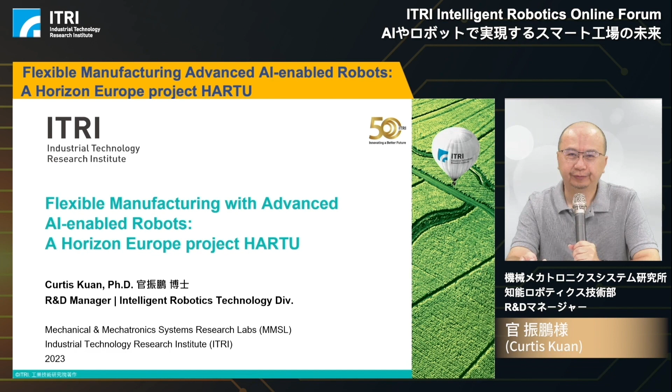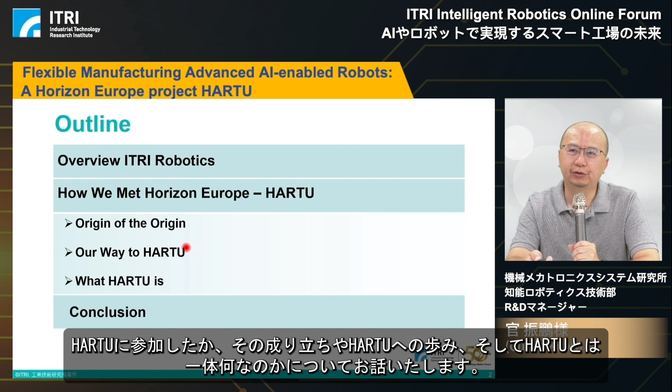First, here is the outline of today's presentation. First, a brief overview of ITRI Robotics is introduced. Then, how we joined the HARTU project, including the origin, the progress to HARTU, and what exactly HARTU is. Finally, a conclusion is provided.

As we know, ITRI was founded in 1973. It's an independent nonprofit innovation institution in Taiwan. Our scope is developing technology for commercializations and nurturing open innovation with academia, industry, and global partners. That is why I am here to introduce our global collaborations, especially with the European partners. The other scope is incubating and spawning startups for emerging industries. The most famous spin-off companies are TSMC and UMC in semiconductor areas.

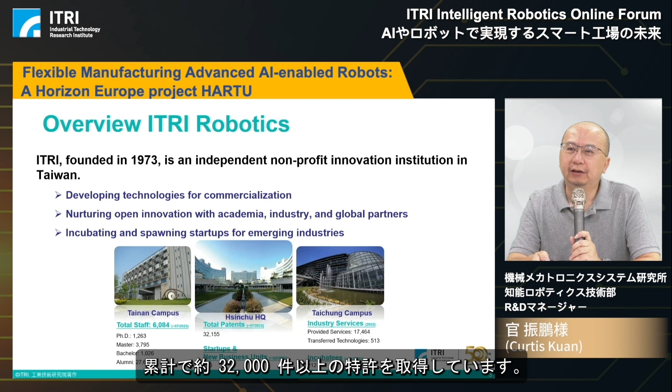ITRI has several offices around Taiwan and global branches in Tokyo, Japan, San Jose, Silicon Valley in the United States, and Berlin for the European business. Here is our basic information about ITRI. We have Tainan campus and the headquarters in Hsinchu and the Taichung campus. We got many staff with PhD degrees, master degrees, and we have total patents around 32,000 and more.

This slide will introduce our robotics achievement in the past years. For the future, we have robotic development in ITRI. We have core technology related to controllers that we call I Can Think, the vision system for robotic system that we call I Can See, and several applications, use cases in the practical industrial area. We call it I Can Work, and the mobility, I Can Move.

For the I Can Think, we especially developed the robotic controller and the navigation algorithm and the simulators with EZSIM and ASimo. The vision system is for the robotic system, we call it FOVision, especially for object recognition and navigation. For I Can Work, we have implemented several industrial applications, such as in aerospace manufacturing, drilling, or painting for the high-speed railway, and the grinding and polish application for the semiconductor instrument, and the robotic weaving system for the composite material handling.

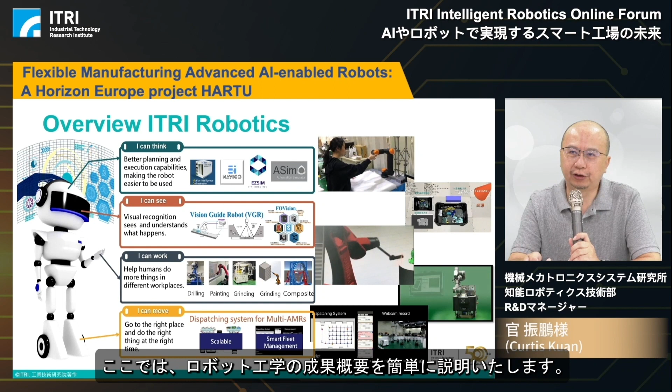Here, the next page, we want to say how we met Horizon Europe, HARTU.

I want to introduce the origin of the origin. From 2002 and 2003, we joined the European project called Muffins. This project is related to multimedia processing in the MPEG-21 environment. ITRI is one of the partners, and the other partners are Imperial College in the United Kingdom and IMEC for Belgium, plus other partners from European countries.

And the other project, from 2003 to 2005, we got another partner from Switzerland. Based on our research capability in the past, almost 20 years ago, we joined these two projects.

From these experiences with European partners such as Fraunhofer, Imperial College, IMEC, and Vodafone, we learned several lessons. The first is that the basic core concept idea is very critical. Use cases and user scenarios come first, then based on this scenario and requirement, we implement the technology development.

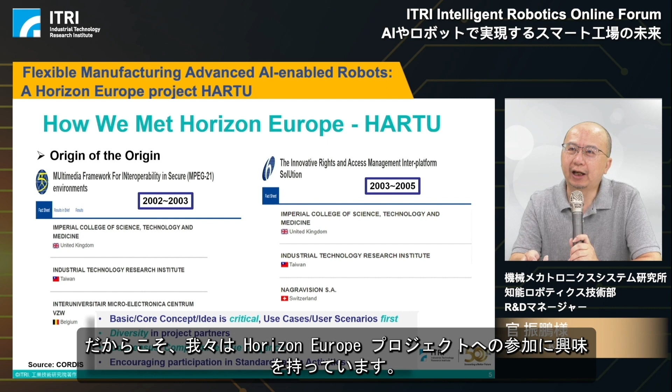In these projects, they encourage participation in standardization activities and promote the achievement from the project to standardization organizations. So from these experiences, project achievement will be more applicable to real and practical use cases in industrial applications. That's why we have interest in joining the Horizon Europe project.

So here is the slide showing our way to HARTU. In 2017, from the EU-Taiwan Industrial Policy Dialogue, we decided we needed to discuss AI robotics. EU and Taiwan agreed to focus on the development of AI plus robotics and start preparation of a robotics working group. In 2019, we established the EU-Taiwan Robotics Working Group.

In this working group, we discuss regulations, policies, and joint research topics, especially on AI, data, and robotics. This group was established based on the consensus of European Commission Director Generals, for example DG Grow, DG RTD, and DG Connect, especially for ICT technologies.

Through 2020 to 2022, both sides of EU and Taiwan discussed joint research topics, including digital twin, human-robot collaborations, and AI robotics. Based on our consensus from both sides, in 2022 ITRI cooperated with the German AI Research Center DFKI, the Spain Research Institute Tekniker, Philips Consumer Electronics, and the Turkey Automobile Company, forming a research consortium. We call it HARTU.

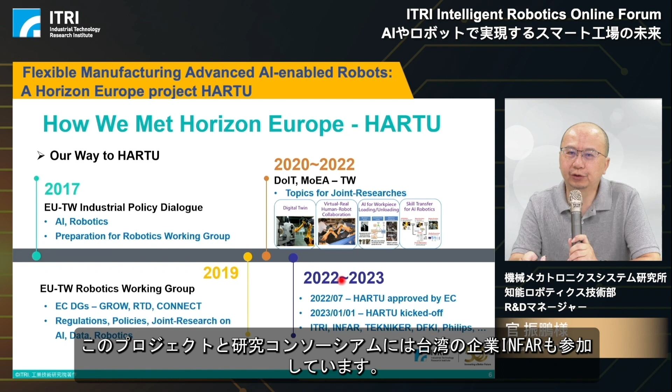This project got approval by the European Commission, and the project kicked off in January this year. A company from Taiwan, Infra, also joined this research consortium. So what exactly is HARTU?

HARTU is the abbreviation for Handling with AI-enhanced Robotic Technologies for Flexible Manufacturing. As described in the previous slide, there are several partners from all over Europe, plus two partners - ITRI and INFAR - from Taiwan. All partners are listed as this figure shows.

What HARTU focuses on are five use cases. The first is fixtureless assembly, especially for hand tool manufacturing, which will be implemented by ITRI and INFAR, the Taiwan partners. The second use case is assembly for consumer electronics, implemented by Philips and FMI, from the Netherlands.

The logistics use case and car assembly transport is implemented by Tekniker and TOFAS, the Turkey automobile manufacturer. And especially for the packaging use case, about food handling, it's implemented by the Italian partner POLIBA.

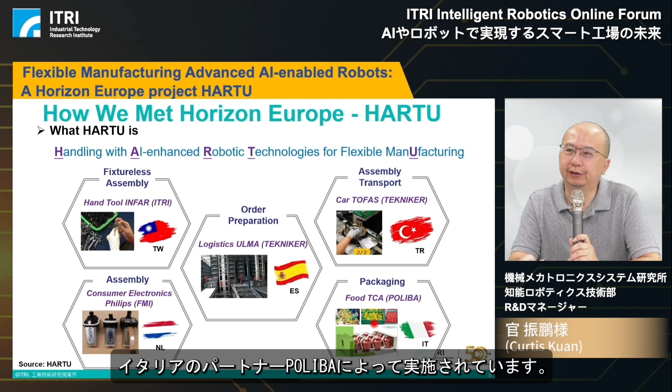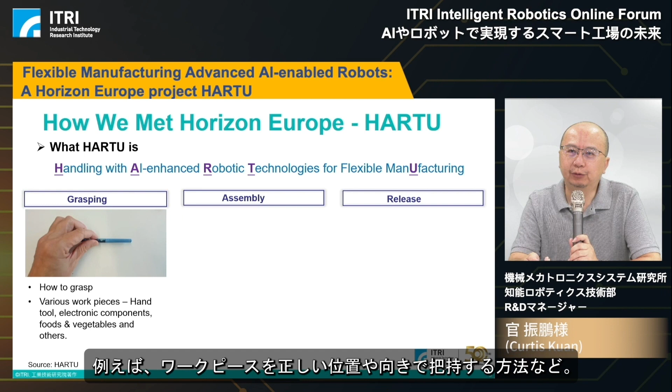In this use case, we want to focus on how to grasp a workpiece, such as how to grasp it in the right position and right orientation. We will handle various workpieces such as hand tools, electronic components, foods and vegetables, and others. From grasping, we need to assemble all the components into one product, so we need to handle the contact force, assembly procedure, accuracy, and compliance between the workpiece and the adaptation to various workpieces with different size and weight.

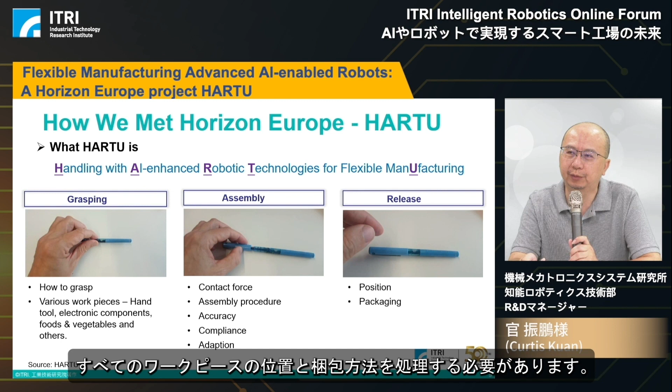And finally, we have to place the assembled product into the right place. We need to handle the positioning and how to package all the workpieces. So here is our scope for the HARTU project.

Finally, here is a brief conclusion. HARTU is a real international research project with 6 countries without mother tongue as English. By participating in this project, we will learn how to cooperate with various countries from Germany, Spain, Italy, Netherlands, Turkey, and Taiwan. We have to achieve consensus and compromise with each other, and do the assignment work with due diligence.

Here is the reference for the Horizon Europe Cooperation Framework. The European Commission has assigned a 95.5 billion budget for research and innovation activities.

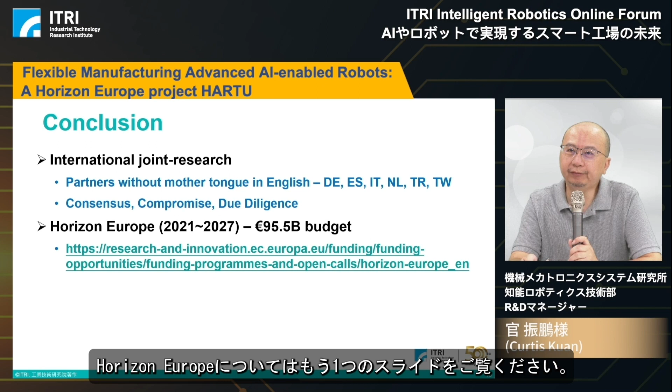Hi everyone, I'm Sergio. I am an engineer from the Robot Manufacturing Unit Department at ITRI. Today I will talk about our intelligent robot vision systems and meta factory developments. I'm going to introduce two key products developed by our department, RoboTwin and FOVision.

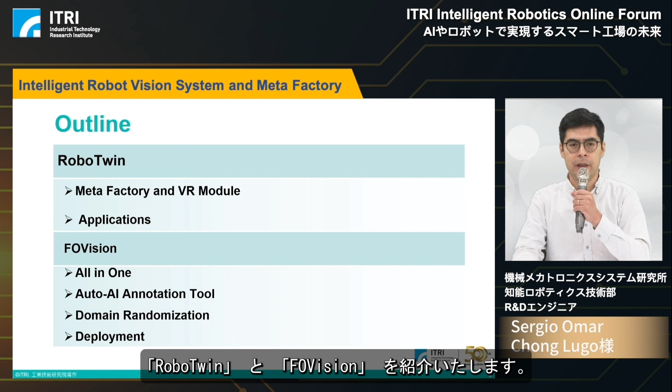Nowadays, in the context of global connectivity and increased demand for efficiency and an accelerated production pipeline, businesses are making their physical factories entirely describable in terms of software. No matter where users are located around the world, with the aid of 3D digital environments, virtual reality deployment, and a communication scheme between digital and real assets, users can perform sensitive operations in the digital world and bring optimizations to the real world. This is the idea for MetaFactory, which serves as a realistic virtual environment replicating actual factory layouts, robotic cells, and workpieces.

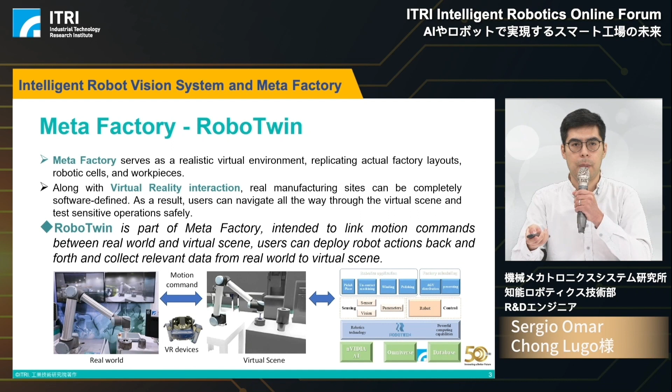Along with virtual reality interaction, real manufacturing sites can be completely software-defined. As a result, users can navigate all the way through the virtual scene and test sensitive operations safely. More specifically, RoboTwin, as part of MetaFactory, intends to link motion commands between the real world and the virtual scene. Users can deploy robot actions back and forth and collect relevant data from the real world to the virtual scene. The purpose of RoboTwin is to achieve capable human-machine cooperation by connecting VR equipment combined with a high-fidelity physical engine from NVIDIA Omniverse, resulting in a human-machine mixed-line interactive simulation technology.

Here we have one video. For instance, the user is wearing a VR headset and also grabbing a virtual stick. Using one of the VR controllers, making the virtual robot follow the stick. This action is related to robot teaching.

In another case, we have a user wearing a VR headset. Meanwhile, the virtual robot is performing defined motion commands, and compounds of data coming from the real world in the form of images and other graphics are projected into the virtual environment for the user's interest.

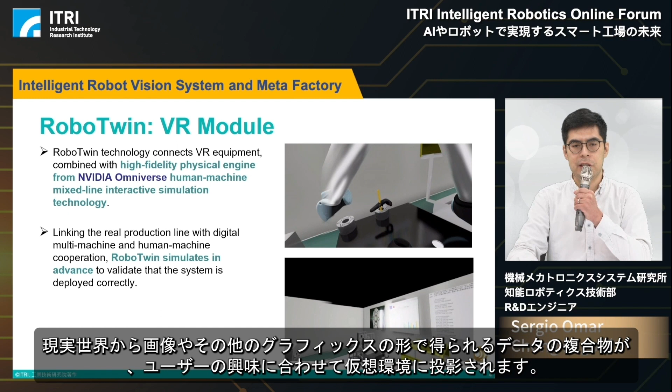RoboTwin comes with two operation modes. The first one is known as follow target mode. In this mode, the user grabs the virtual stick and the virtual robot will follow this tool in real time. Therefore, joint states will be shared to the real robot, resulting in real-time synchronization.

Robot safety is also considered, along with a virtual reset option to prevent both robots from any undesired displacement. One more feature is that 3D animations of the workers are included in the virtual scene to make the virtual reality experience more realistic.

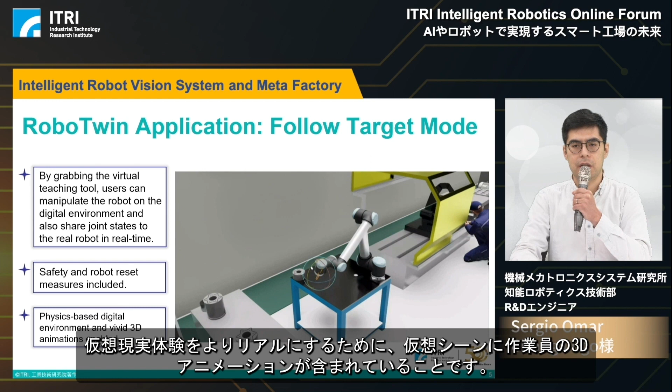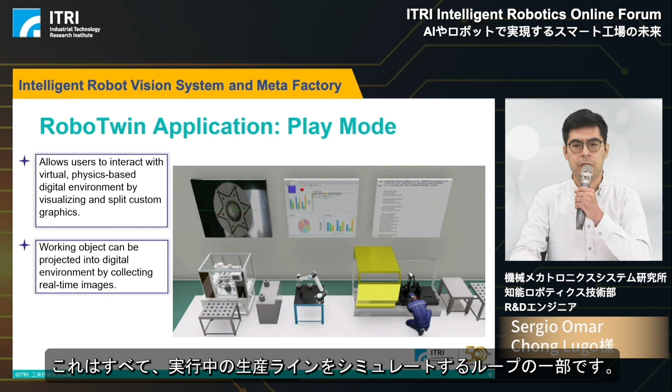Let us now refer to RoboTwin's second mode, known as Play Mode. In this mode, the virtual robot is given defined motion commands. Those are shared to the real robot to achieve real-time synchronization. At some point, data from the real robot is collected and projected into the virtual environment. This is all part of a loop to simulate a running production line.

So now, let us proceed with our second product known as FOVision. FOVision mainly consists of three pieces of hardware: a 3D camera, a particular lighting source, and an edge computing device. The system will collect light-controlled 2D images along with 3D point cloud data to be processed by an embedded AI object recognition model.

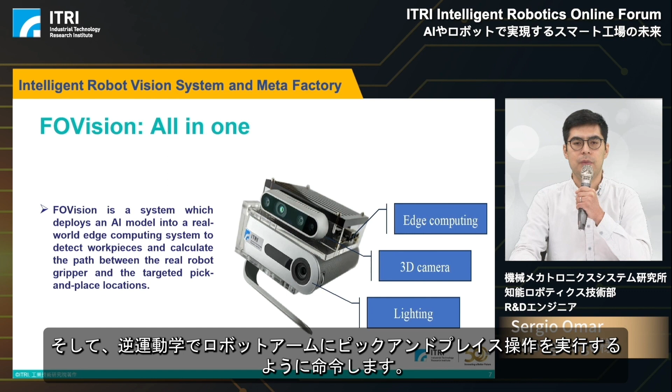At the same time, the system will compute pickable points over the work pieces, and it will command the robot arm with inverse kinematics to perform pick and place operations.

As a matter of fact, AI training for object recognition demands reasonable training datasets. Therefore, manual labeling can be tedious and time-consuming. In contrast, FOVision offers a modeling and automated AI tool capable of mapping real-world 2D images into each workpiece 3D CAD model representation. This tool not only enhances the realism of the virtual environment, but also automates the generation of annotated datasets, capturing pickable and unpickable points for each workpiece.

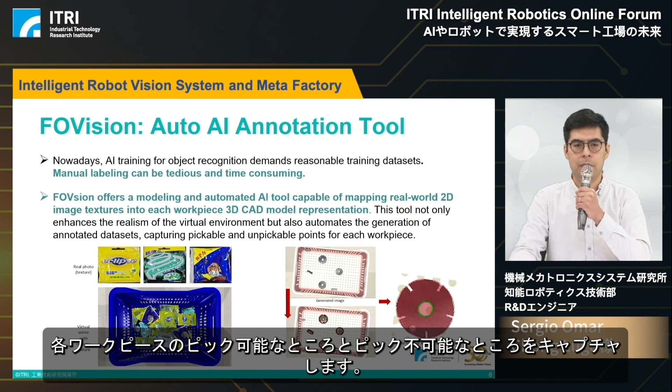To ensure that valid training dataset acquisition is doable, the AI annotation tool makes use of our domain randomization approach. In this way, several parameters will vary, such as workpiece posture and quantity, camera lighting and posture, light intensity, and color rendering. Here we can observe how the algorithm makes changes in the bin color, and also the objects are placed randomly, and they all have variations which will make the training dataset stronger.

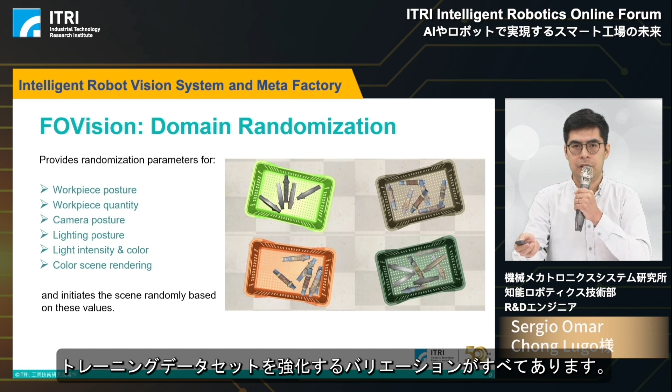So with all this being said, let us observe FOVision deployment. Considering a real working environment, FOVision collects data from a container loaded with metallic pipes and commands an industrial robot arm. The synthetic training dataset generated to train the embedded AI object recognition model proves to be valid in this case. So here we observe the objects loaded into the container, and then we can see the masks obtained by the AI object recognition model.

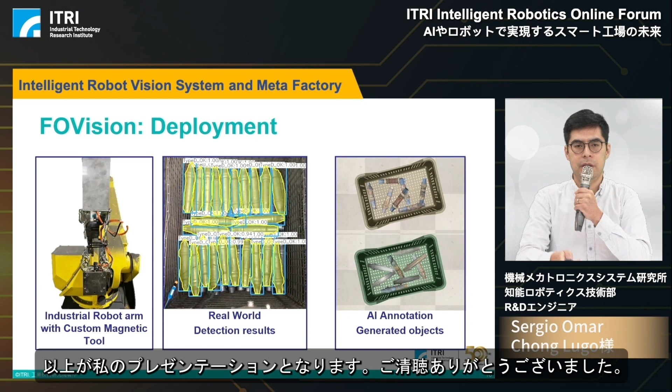And all of this is the result of the trained dataset, which has the variations mentioned before. So this is all for my presentation, and I thank you for your attention.

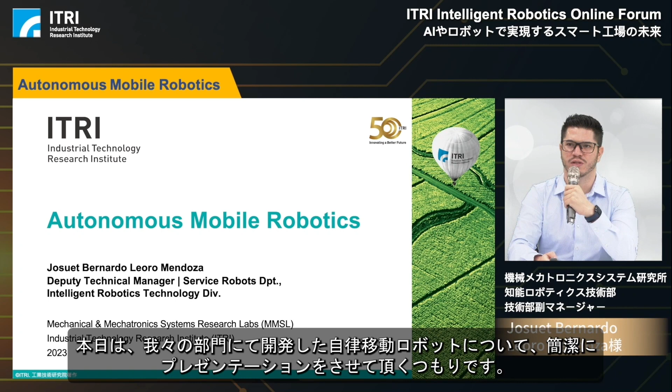Hello everyone, my name is Josuet. I'm the Deputy Technical Manager of the Service Robots Department, and today I'm going to give you a short presentation about the autonomous mobile robots that we have developed in our department. My presentation is going to consist of two parts. First, I'm going to give you a short presentation of the intelligent AMR solutions that we have developed. And then in the second part, I'm going to show you some interesting applications where we combine robotics with arts.

In our department, we have been developing autonomous mobile robots for quite some time, but we also have developed other types of robotic systems. For example, we develop a human-like robotic hand.

Regarding the autonomous mobile robots, we have developed some mobile-based robots. This mobile-based robot can carry 100 kilograms, but we have developed platforms for 250 kilograms, and we are hoping to develop soon platforms for up to 2 tons.

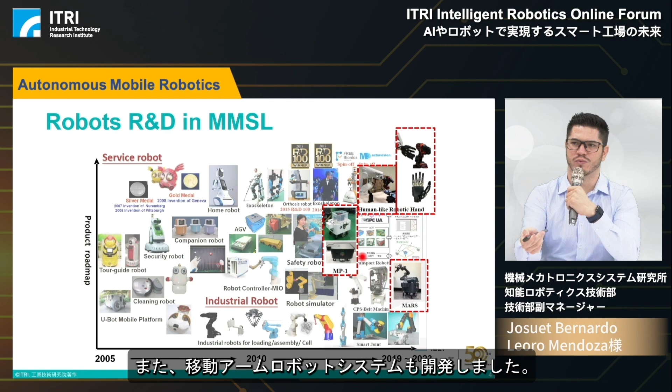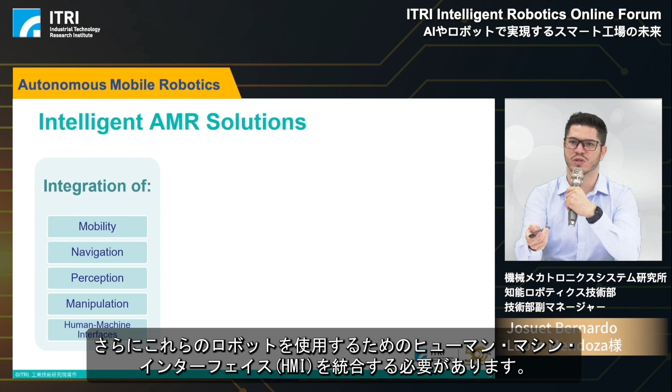We also develop mobile arm robotic systems, like this robot here called Mars Lite. In our intelligent AMR solutions, we need to integrate mobility, navigation, perception, manipulation in the case of mobile arm robots, and also human-machine interfaces to use these robots.

Using all this integration, we can develop solutions for the industry. For example, the mobile arm robot here that we can use for pick-and-place applications, and other applications that require the robot arm. We also have developed some applications for the autonomous forklift.

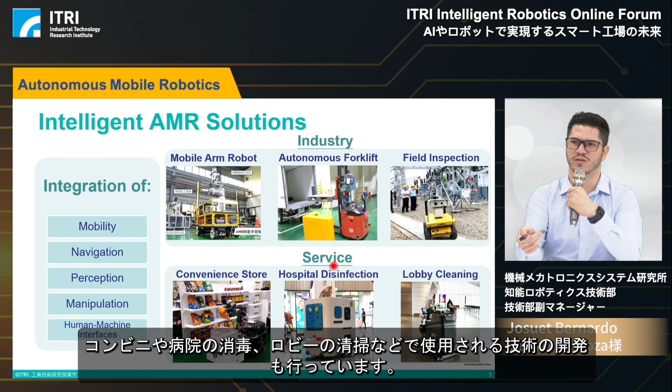In this case, we developed a technology to perform the pick and place of a pallet. We also have done some outdoor mobile robots where we use a robot to monitor an outdoor area for some companies. And in the case of service, we have also been developing technologies to be used in convenience stores, hospital disinfection, and lobby cleaning.

This was done to mimic a real manufacturing cell where we have multiple processes that these workpieces have to go through. This mobile manipulator will be in charge of moving around these workpieces.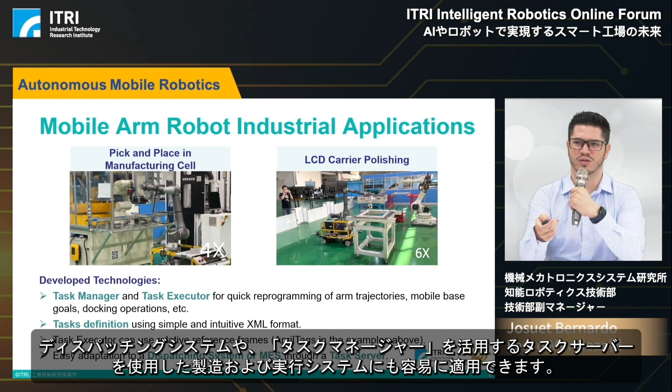This task executor can also use relative reference frames. For example, in the 2 videos that I showed you, we use April tags to reference how the movements are going to be done. These 2 technologies are also easily adaptable to a dispatching system or a manufacturing execution system using a task server, which leverages the task manager.

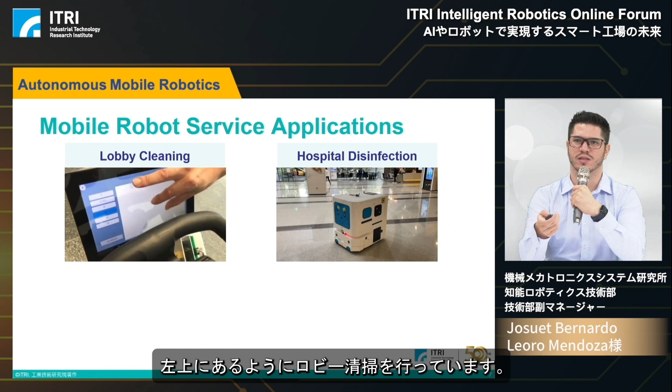Now, in the case of the service applications, we have the lobby cleaning, as you can see in the top left. This is an Ackerman type robot, and we adapt our technology to this existing cleaning robot to perform lobby cleaning.

In this case, you can see the robot is performing this cleaning trajectory that we computed based on the cleaning area that the user wants to do.

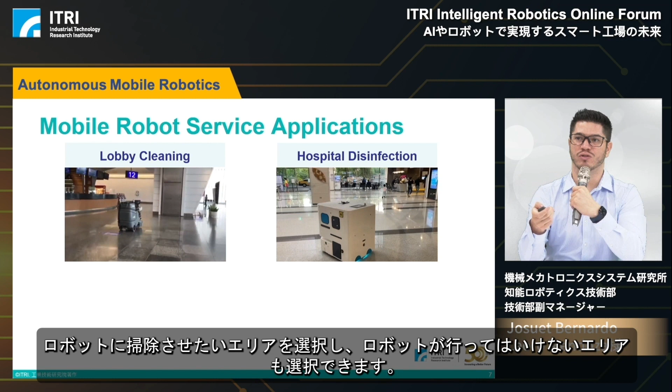We also have the hospital disinfection, which uses a similar technology where we can select the areas that we want the robot to clean, and then we can also select the areas that the robot should not go to. This was already applied in the National Taiwan University Hospital here in Taiwan.

The technology that we developed for these 2 service applications was a multi-area, multi-block cleaning path generation. This means that if you have a big map and you want to clean multiple areas, you can select these multiple areas one by one, and also select some blocks that you want this robot to go to. Then the robot will find the optimal path to move between these areas.

And we can also select the forbidden areas, which are areas we don't want the robot to go, maybe because we're doing maintenance there or for some other reason. We also developed an intuitive operation, an Android-based HMI, as you saw in the lobby cleaning case, where we have a screen to select the map we want to use for cleaning, or select the task schedule or other tasks.

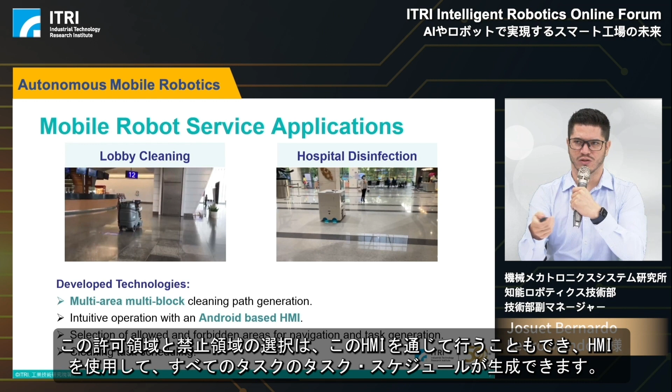This selection of the allowed and forbidden areas can also be done through this HMI, and we can also generate the task schedule for all the tasks using the HMI.

Now, we've also been doing research to execute complex trajectories with mobile manipulators. As you can see on the top left, the robot is moving around this Lissajous path, continuously tracking this trajectory while it moves. You can also see in this second example that the robot is following a sinusoidal path.

This type of trajectory can be used for applications where you actually want the mobile base and robot arm to move continuously. A simple example is opening a door - you might do this step by step, first moving the platform and then the arm. But a more optimal way is by coordinating the movement of both the arm and the platform to open the door.

The technology we developed here is the coordination of the robot arm and, in this case, a non-holonomic mobile base, but we can adapt it for holonomic and non-holonomic bases. The non-holonomic case is just more challenging, so that's why we worked on it.

We also had to do redundancy resolution to execute these complex trajectories, because this is a 10 degree of freedom robot arm. And because this is a highly redundant robot, we also need to consider singularity avoidance to allow the robot to perform this task.

We also included self-collision and joint limit avoidance as constraints to execute all these paths. So in both videos, what you saw was the robot executing this task while continuously avoiding singularities, self-collisions, and joint limits.

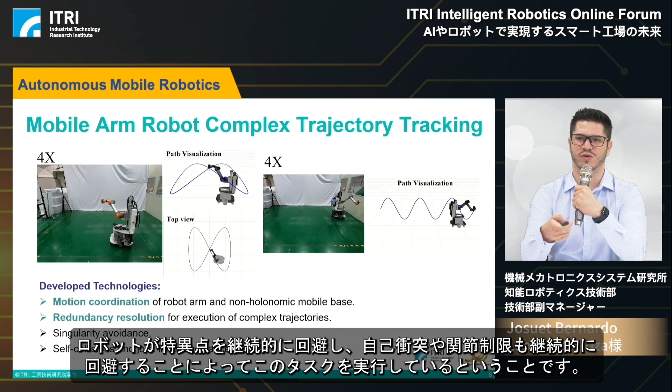Now, in the second part, as I said, we're going to show you some examples of how we combine robotics with arts. In the first case study, we have the Freeperson project by the artist Tao Ya-Lun. This project was presented at the Patchlab Digital Art Festival last year in Krakow, Poland.

In this case, what the artist requested from us is he wanted to use a VR headset, which you can see on the top left video. At the beginning, the headset shows a video representing the artist's idea of showing the area where he feels he's trapped, because he can only see around.

After this video finishes, the mobile manipulator on the top and bottom left will start moving and tracking the movements of the headset. What the artist requested is: can we follow the movements of the headset around this area? So he will walk around this area, as you'll see in a couple of seconds.

As you'll see here, once the video finishes on the top right corner, the mobile arm robot will start moving. What you see right now on the top right is the stream from the camera mounted on the end effector of the robot arm.

Right now, as the user - in this case the artist testing our project - moves around this area, the mobile arm robot will follow his movements, tracking both the movement of the head and his location around the area. As you can see on the stream, we're constantly streaming all the movements so the user feels like he's actually in Taiwan. This was recorded in a theater in Taipei, while the user is in Poland, in another country.

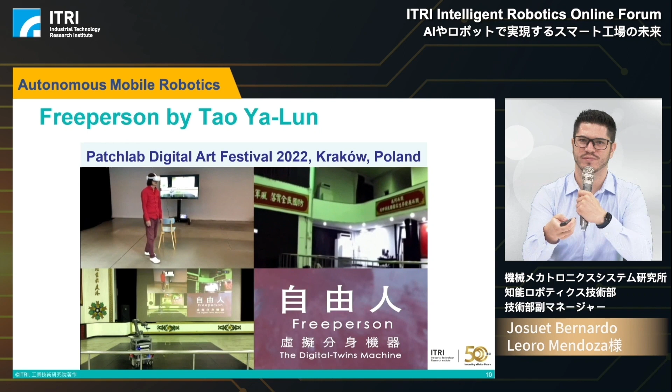Now, for this specific case, we needed to develop an arm target follower. As you can see in this video, the arm is following the movements of the headset as the user moves around.

We also needed to develop a mobile base target follower. In this case, the mobile base needs to follow a target, and the arrow here is pointing to the direction of our target right now. While it does so, we also have to consider there might be some obstacles around the environment, so it needs to avoid moving to those areas.

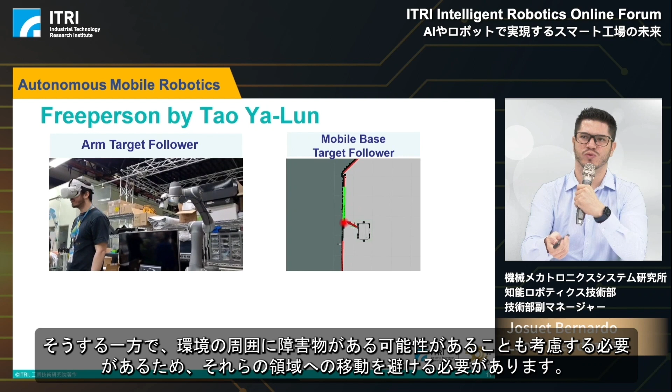Now, the technologies we developed for this project were a remote control for the mobile arm robot, and as I told you, this is a remote control from a different country to Taiwan. Then we developed a smooth Cartesian velocity control for the 6 degrees of freedom robot arm, as you saw here with the movements of the arm.

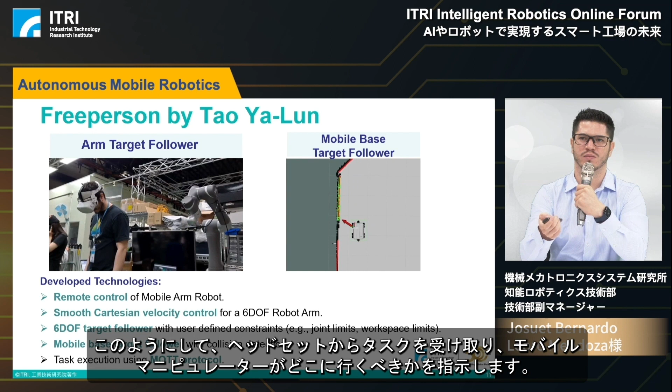This target follower also needs to consider constraints like joint limits and workspace limitations. For the mobile base target follower, we included collision detection, as I just mentioned. All the execution we performed was using the MQTT protocol. This is how we receive the task from the headset to tell us where the mobile manipulator should go.

Now, the second study case: we have this artist asking us to perform the movement of a mobile platform in this circular trajectory that you're seeing in this video. In this case, the robot must just move around this circular trajectory constantly while a performer is moving around it.

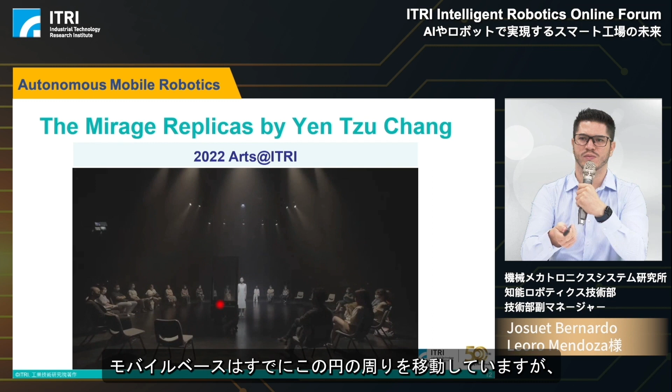The challenges in this project were, first, that the lighting conditions change a lot. We have really dark areas when the performer is moving around, and also a lot of light in some areas. As you can see here, the mobile base is already moving around this circle. The problem was that because the audience is going to be seated around the performance area, there is no way to acquire features to actually localize the robot inside this circle.

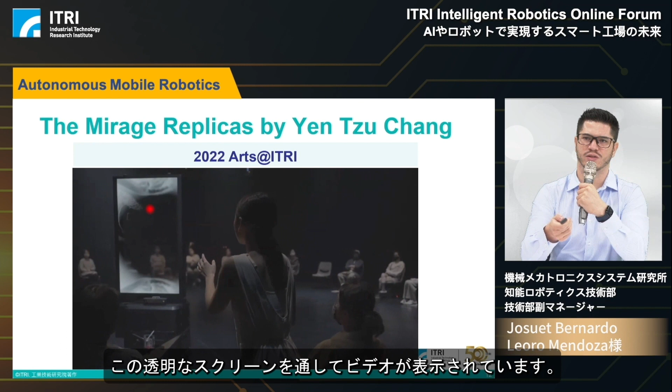So the challenge was how we could develop some localization algorithm for the mobile platform so it can move around accurately inside the circle. As you can see here, the performer is moving around the circle, and we're showing some video through this transparent screen, while the robot keeps moving around the circle with high precision.

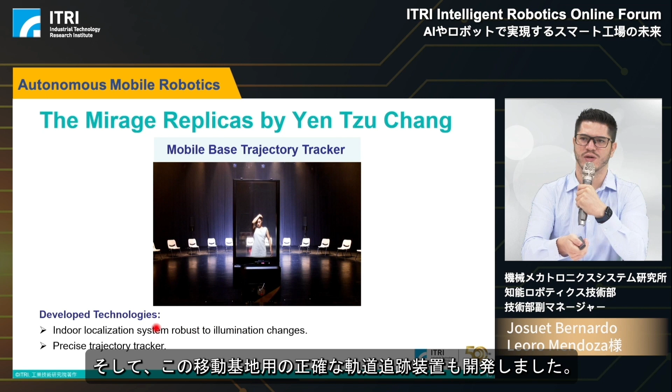For this specific case, we developed an indoor localization system that is robust to illumination changes, and we also developed a precise trajectory tracker for this mobile base. This is the end of my presentation. Thank you.